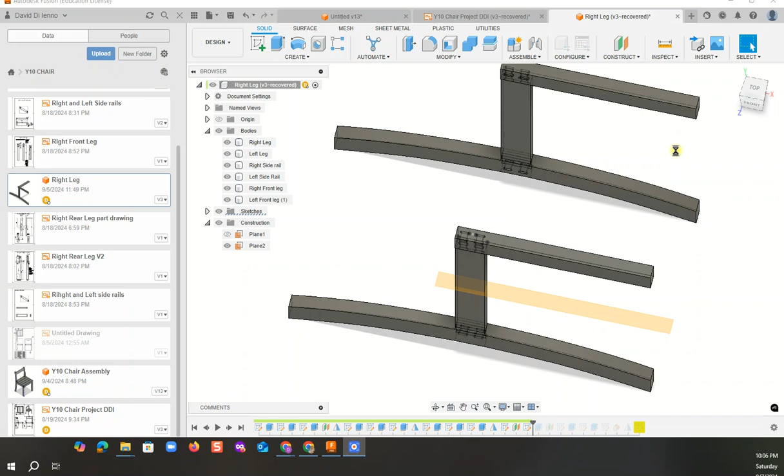We want to be able to create our front and back rails here now on this same sketch, so we've got them spaced correctly apart. We just need to create them. You can start on either one of the two rails, it doesn't really matter which one. I might choose to start on this one here, the right hand side one. So let's start with a sketch, and we'll sketch on this face.

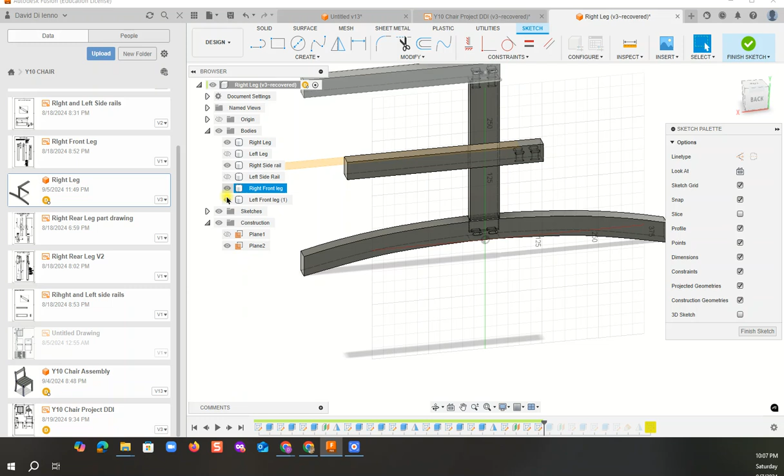What I should have done really is get rid of this because it's going to get in our way. Turn it off so we can't see it. We'll find out which one it is - it's not that, it's left leg, yep, and left side rail. Just by hovering over it you can see, and left front. So I've just turned them off so they're invisible. They're still there, but we just can't see them.

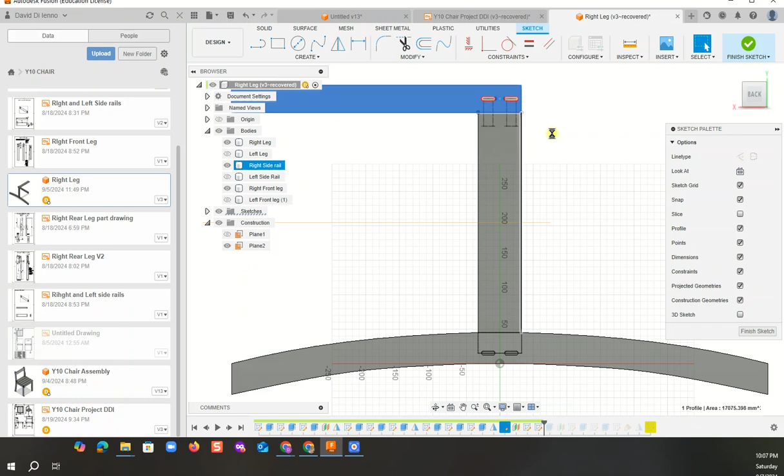So we're going to be sketching as we chose on this face over here. Select that, and I might bring that into view. It's on the back, make it fit by clicking there. Sorry about the hourglass that I've got here - I don't know why I've done that, but I can fix it up later.

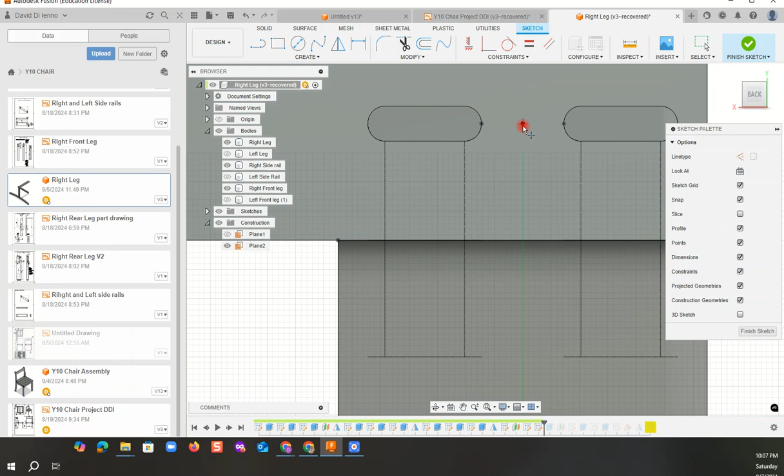First thing to do would be to create ourselves a center point. You can kind of see like there's one sitting in there very vaguely. So let's create a point - click on create, go to point, and select that point right in the middle there. From that point we want to do a center rectangle, so go to create, then rectangle, center rectangle, because we want to bring out the cross section of this shape we're going to use.

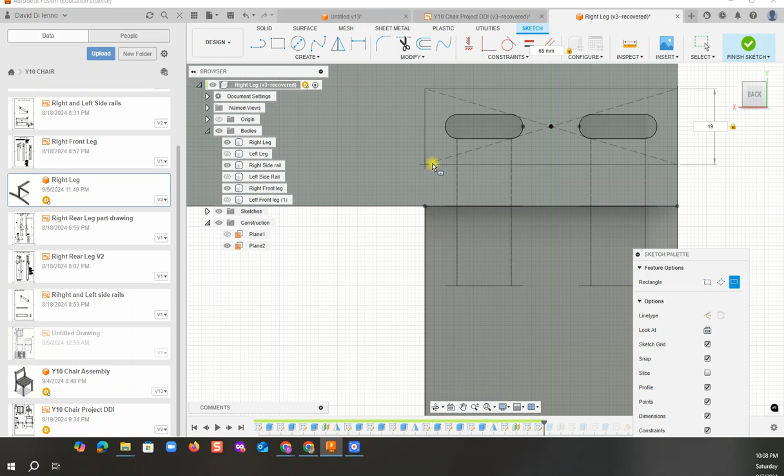Now we know from our past it's the same as the other side rails, so it needs to be 65, so I'm typing in 65 for the horizontal measurement, and 19 for the vertical. I'll hit tab to get the vertical measurement, type in 19 and hit enter, and that should give us the cross section of our leg.

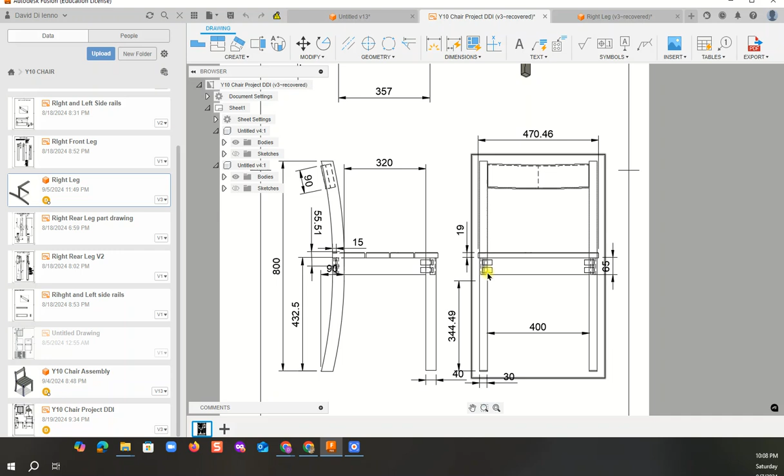Next thing to do would be to extrude that out. We've sketched that cross section on that face. Let's extrude it out - for how long? You could look at your 2D drawing and see that the distance between either end of the front leg or the rear, they're both the same, is 400 millimeters. So let's go back to here and let's do the extrude.

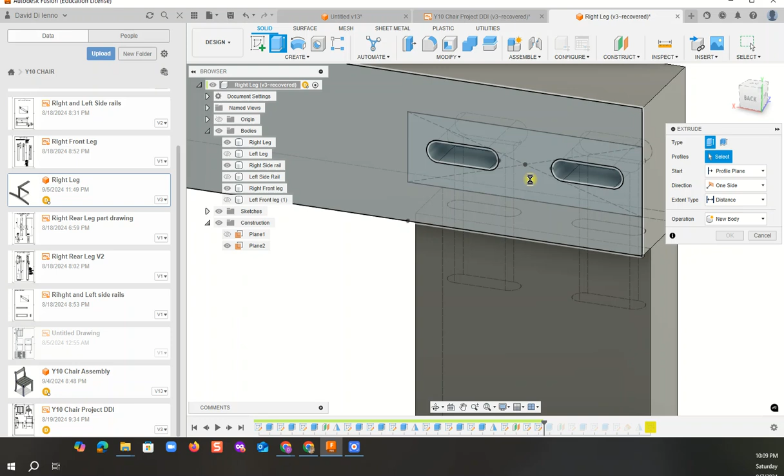So go to solid, click on extrude, highlight the area that you want to extrude, which isn't that. We'll just hit the control button, and we want this area in here. Now there's lots of lines, and that's why you're getting that flashing between each. Move around until you can find the section that you want that's highlighted.

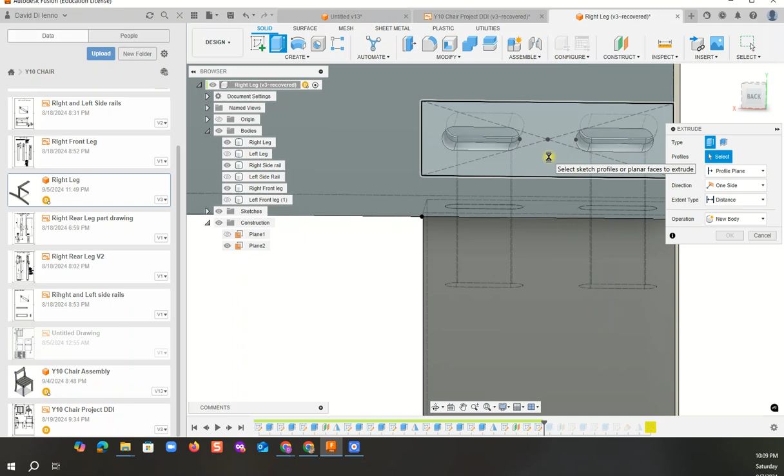Probably not that section. And if you find that it's difficult for you to get the selection that you want, try moving your object to a different angle. Oh, there it is - so I'll hit that one, and I've highlighted that area. And that was easy just by moving the object, because Fusion's looking through objects and it's seeing other lines that are behind them. It's probably a good idea to get rid of lines that you don't need.

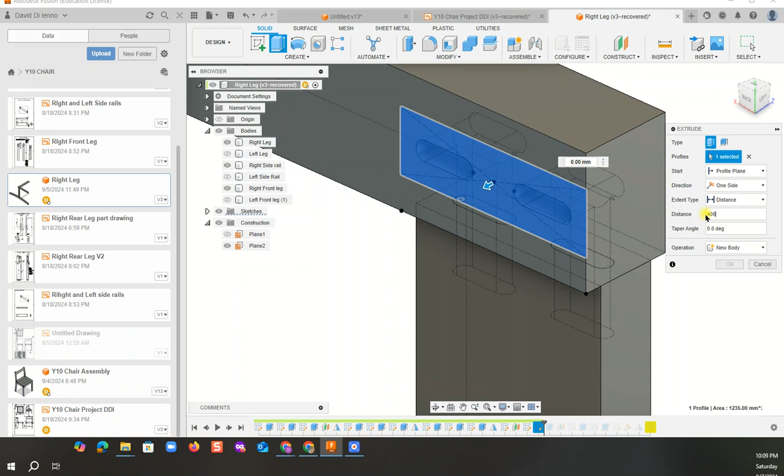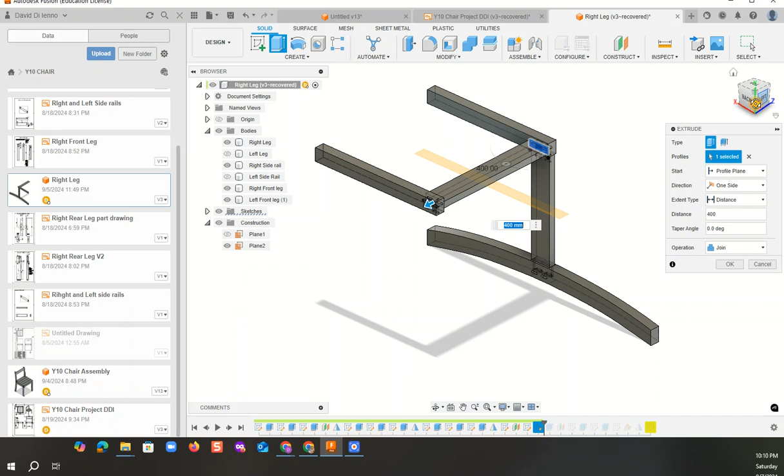Okay, well we're going to extrude it to, what do we say? 400 millimeters. Out it goes. And now it should be the correct distance - I'll make it fit so we can see it. There it is, 400 millimeters. And if you wanted to check it and make sure that it is there in the right spot, let's try left front leg, and it should be just in the right spot for us. Looks like it is. Pretty good.

Alright, I'll turn that leg off again - I don't want to see it at the moment. And now let's create our dowel holes. Now probably the easiest way to do that would be to work from, let's say, I'm trying to work out whether it works in the front or the back.

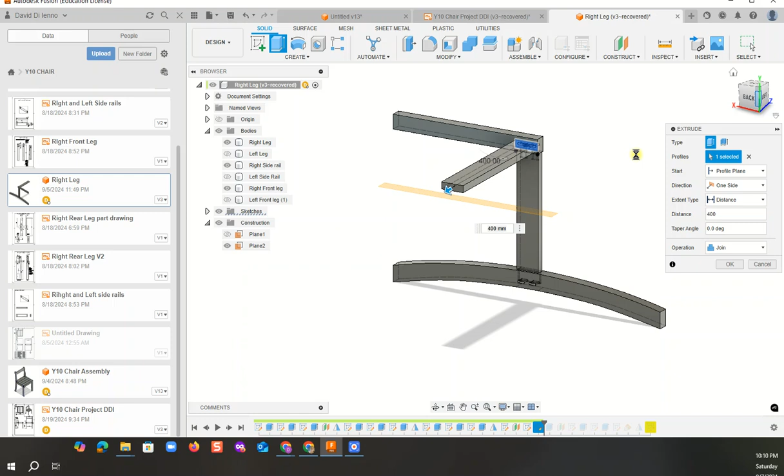First, let's see how we've got the join function here. We don't want to join two bits together, we want to create separate items. So let's go with a new body, which will make it a different item to the other legs. See how they highlight differently? If they were joined, it'd all be the one item, and I don't want that. Click OK, and that extrude is done.

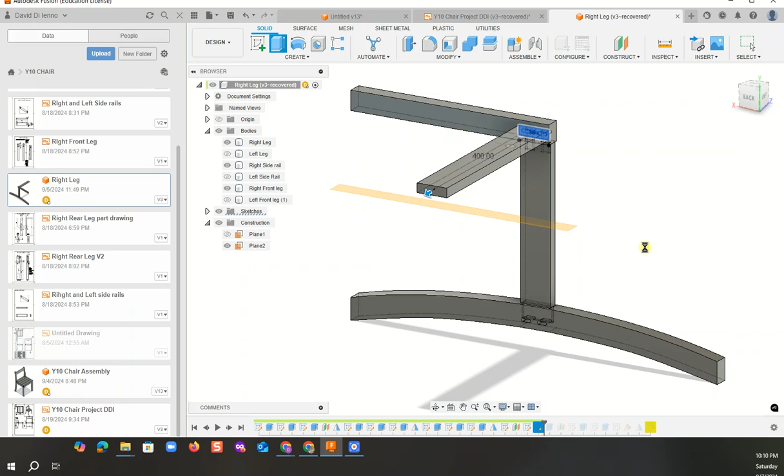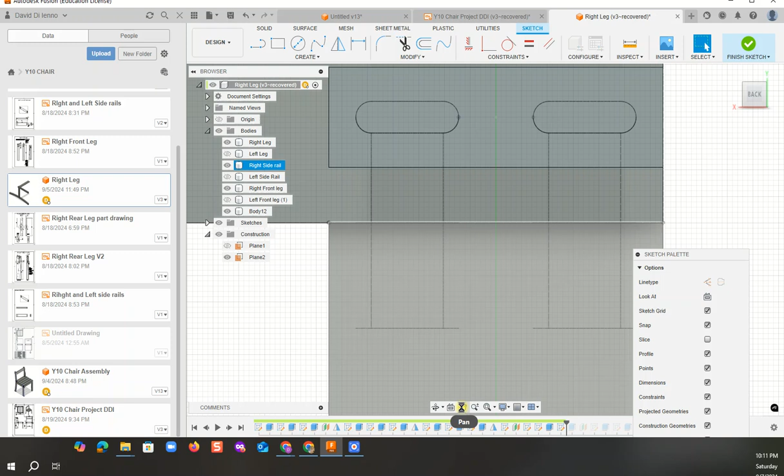Now I'm going to create my dowel holes over here, so I'm going to create a sketch and click on there, and make it fit by clicking on the fit button. If you hold your mouse nearby and just scroll, it'll come and fill the screen. If you find yourself a little bit out of position, just grab the grab handle here and bring it into position.

Hit escape to get out of that. And now you can see that we've got the centers of where the dowel is supposed to be, the dominoes sit up there for us.

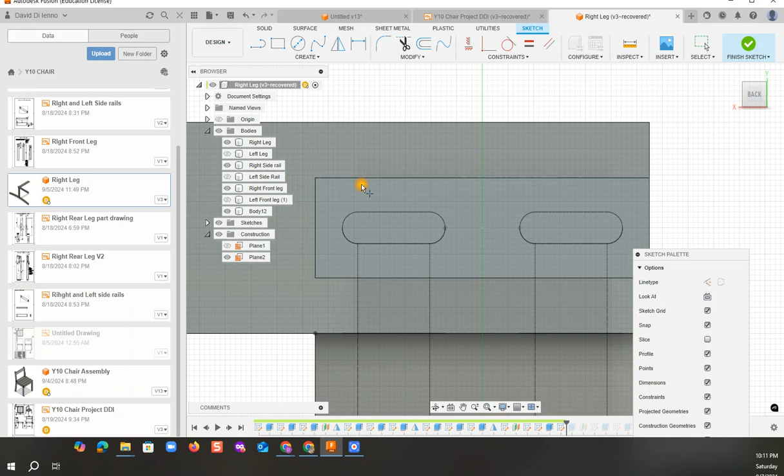So what we want to try and do here is create another point, so if we can get the two inside points, the outside radius points, that point - I have to draw the slots again, because those slots are actually drawn all the way back here on the front leg, not on this section that I've decided to draw on.

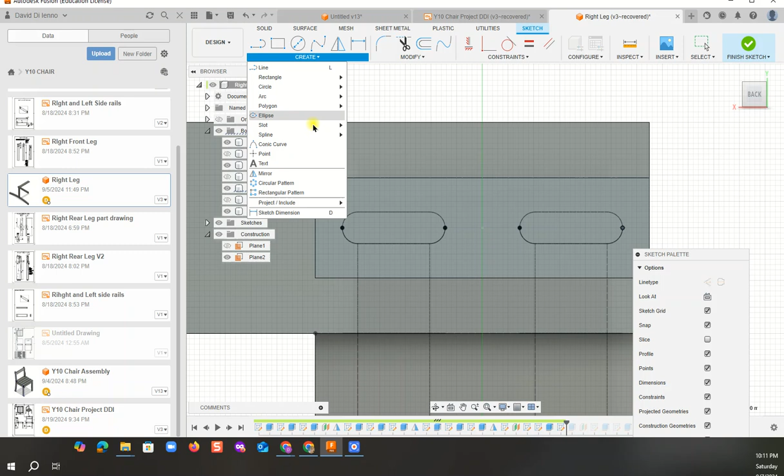So remember how to do slots: just create a slot down here, then overall slot, because we want to go from end to end. So from that point to the left point, drag it out, and we tell it we want it to be 6 millimeters. That's brilliant.

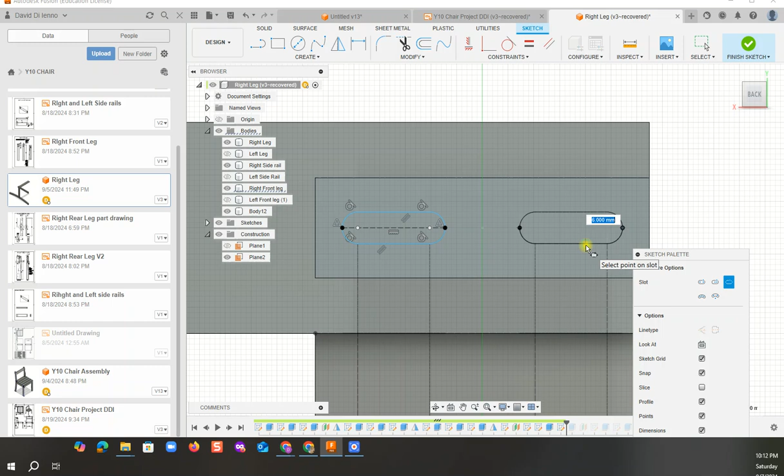Then we do the same thing again: create slot, then overall slot, and we do the same deal. Highlight both points, drag it out to 6 millimeters, which you kind of guessed already. Click yes, and we're pretty happy with that.

So we're drawing on the end - sometimes it's easy to forget what you're drawing, but you're actually drawing on the end of this. So let's dig out those two domino mortises by going to solid and then extrude.

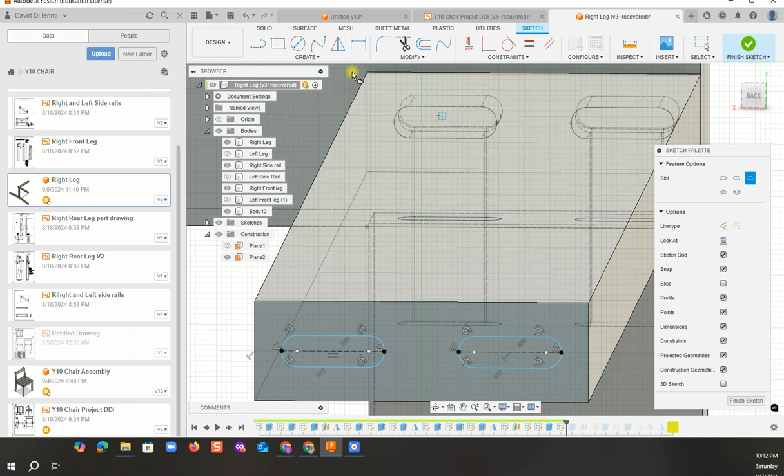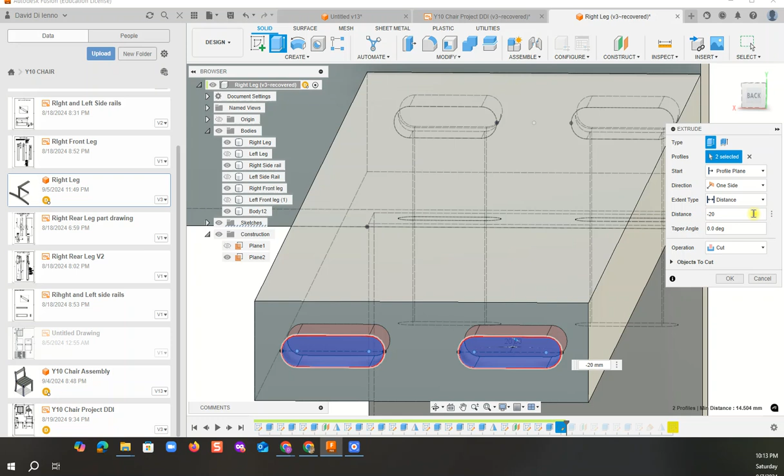We'll go select those two shapes, control to get the next one as well - hit the control button, or I think it's still control on Mac - and then we're going to cut, and drag this stuff. Probably -20 will be the distance, because remember it's half of the domino. So click on -20. There we go. And we'll click OK. So we've cut in those two domino holes to the correct size.

Now we've got to mirror that, because remember we've only really cut them on one side. So we want to mirror that.

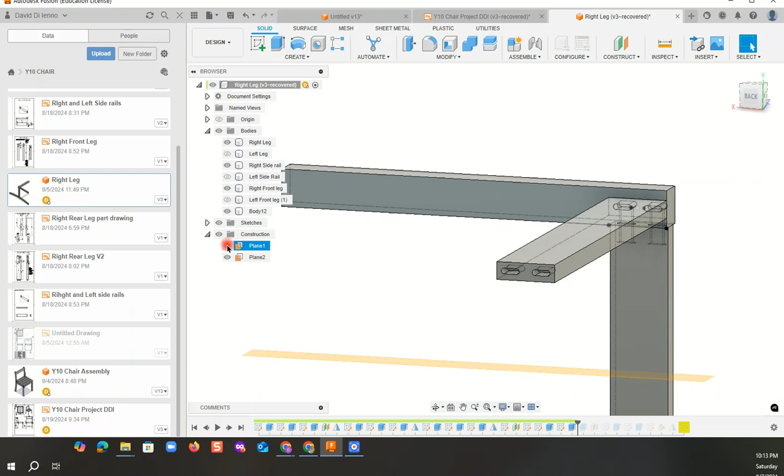Now if you recall, planes are a wonderful thing. We've got this center plane over here, which is pretty good - I'll tell you about that in a minute. But we've got another plane which you can't see because I've turned it off. So to see where your planes are, you can go under construction on your left menu bar. Go to construction, and plane 1, which was the first plane that I made - I've just turned it back on again now, and you should be able to see it.

So I'll center this - there it is there. Remember, that's the center plane looking down from the top, right in the center. Now, we should be able to mirror those two domino joints to the other side of the front rail, through that mirror plane. Let's see if that works.

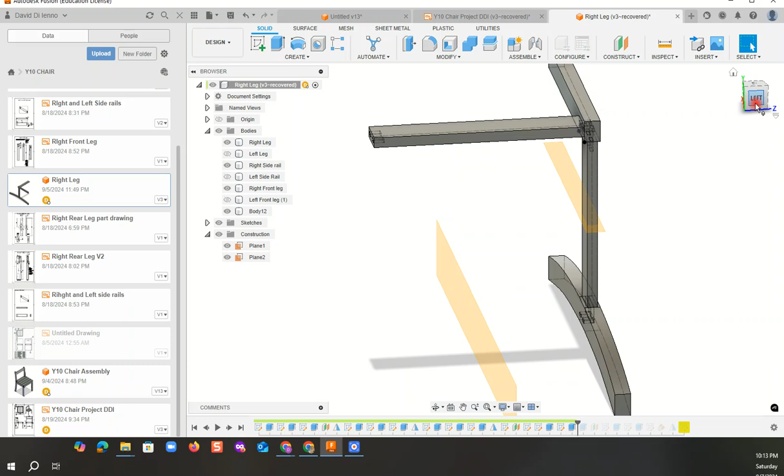Okay, so we'll go to the create mirror function, create mirror, and then the dialog box asks us what we want to mirror. We're going to mirror feature, because we made some stuff, we extruded it, it was a feature, and the feature was the last extrude that we've done, which we can highlight down here - it's those two things, or we could have gone up to this and highlighted it over there. I've just chosen to go on the timeline and highlight the latest extrude. So there it is.

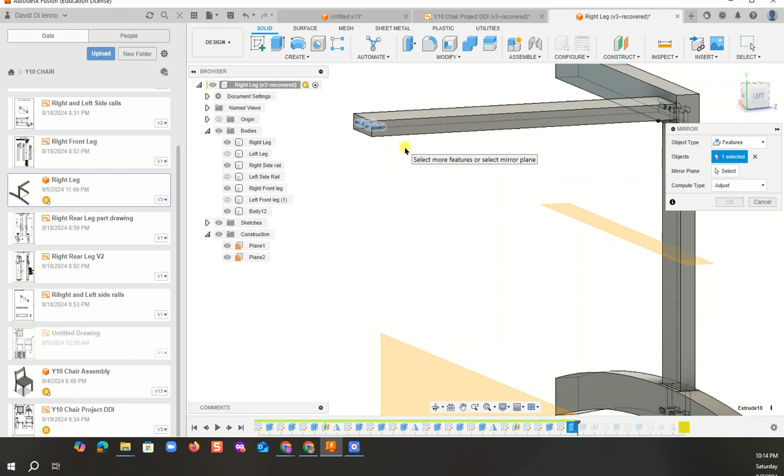We've extruded that, and now we want to mirror about a mirror plane. We'll select the mirror plane by highlighting it in the dialog box, then selecting it, and there's our two dominoes that appeared on the other end. So we'll click OK. See that?

So that was pretty easy, just using the mirror function and these planes. Now if they get in the way, you can always turn them off by going to construction and clicking on the eye to blank them out, and the planes will disappear just like that. Well, I'm going to keep them on for the moment because I'm going to use this one.

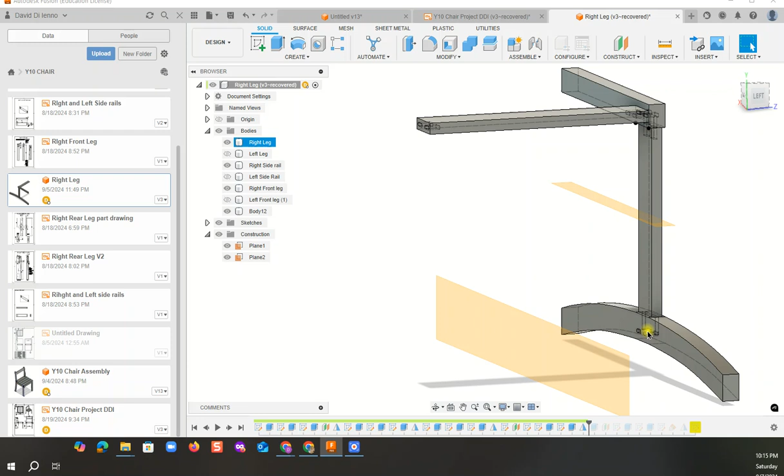Now I want to mirror this front leg to the back, but I want it to mate into these two dowel holes that I've used on the back leg. So to do that, I need to know the distance from the center of the dowel holes up here to the center of the dowel holes down there, and then I'll create a plane in the middle.

Look, I can tell you, you can do that from the drawing. You can do an inspect and measure. There's lots of ways of doing that. I've discovered it already. It's 175.5 millimeters, and I've created a plane here.

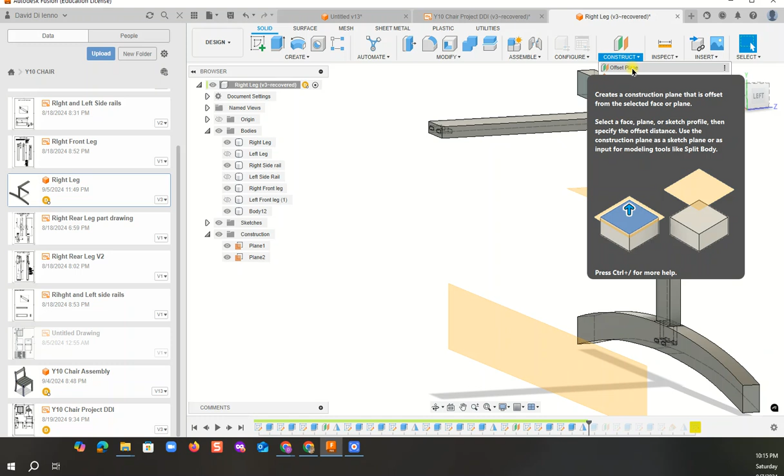It's an offset plane, so we've done this before. You just go to the construct feature, select offset plane, and then you tell it what surface you want to offset from, and you can choose that surface, whichever one you want.

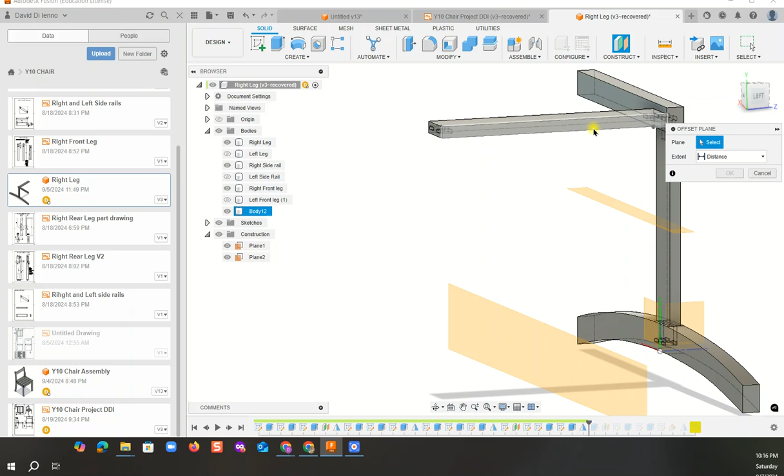You might create another plane here to get yourself in between those, right in the center of those dowels, or you can do it from the back surface here to the front there, or the inside surface. I think I used the inside surface of the front leg to the inside surface of the back leg, and then I measured that distance, so I created the plane, and then the plane appears — that's the plane I've just created over here.

So now we're going to mirror this feature, this entire little body that we've done, about that plane, and it should land perfectly matching up with the dowel holes on the other side. So let's try that. It should work.

So we'll go to mirror, modify— oh, it's not modify, it's create. You should have told me. Alright, mirror, and then we're going to select the feature. Well, it's not a feature, it's a body. Alright, so it's a body.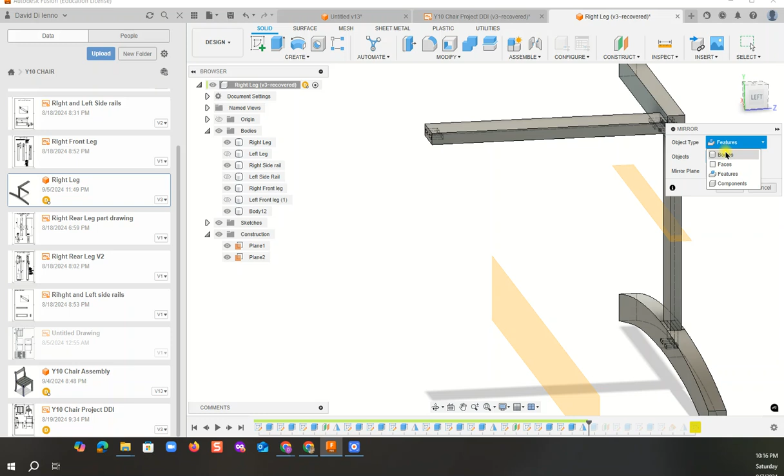Remember I told you I like to separate bodies? Now this one highlights, so I just highlight it. Beautiful. And then select the mirror plane — it's this mirror plane over here, and you can see how the object just sits in the spot. Click OK, and it should be pretty well spot on.

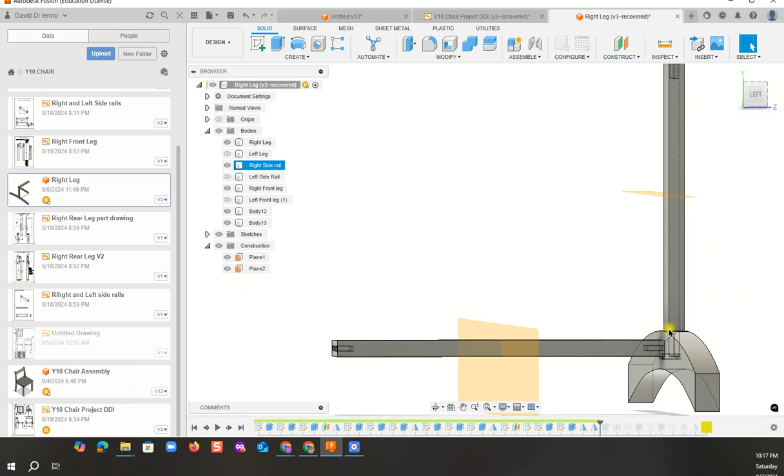Let's have a look at it a bit closer. Yep, well, not quite — see how it's off center here? There's obviously something not quite right with that plane, and the distance isn't quite right. So this plane here is not exactly in the right spot; it's a little bit too far in one direction.

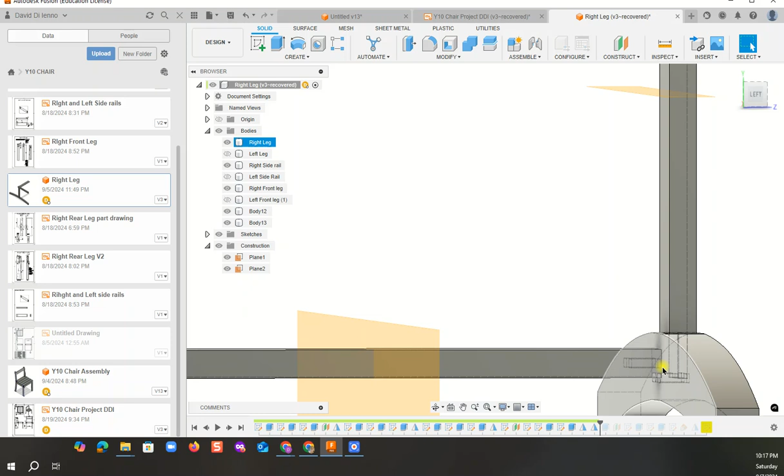So I can measure that distance there from here to here, and it looks to me as though it's probably about 7 or 8 millimeters. Then I'll just adjust the plane height or the plane offset and make this thing line up — those two dowel joints right there, that one needs to line up with here. It's not super difficult to do that. You can do it if you choose.

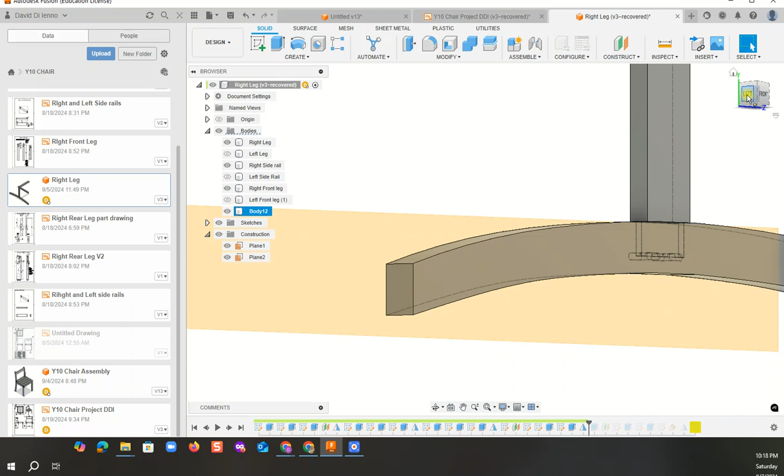Now, if you're going to do that, I'd suggest you delete the mirror you've just done — click delete — and then readjust your plane, and then do your mirror again. That would be the best way to do it. I think I'll leave you to do that, and you will have produced the correct project.

I've done it — it's sort of sitting over here now, and there it is, lined up correctly with all the dominoes in alignment like that.